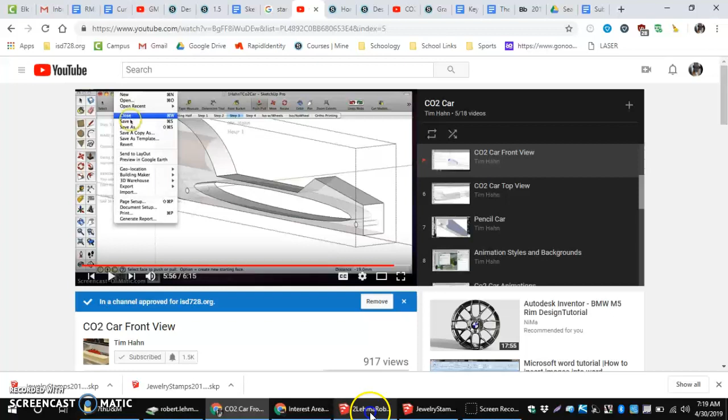In this video, I'm going to show you how to do our front view cuts. So we're going to be modeling and taking apart our front view cuts.

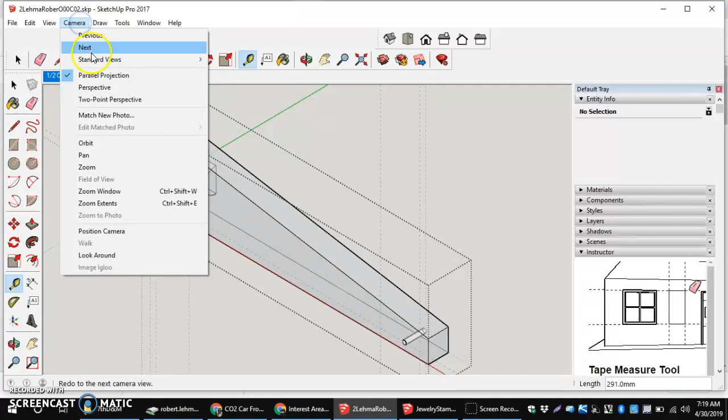Before we start, a few things to think about: first, the area around our CO2 cartridge. To help see this better, I'm going to go camera, standard views, front. The area around our CO2 cartridge, we should stay about 3 millimeters off of that.

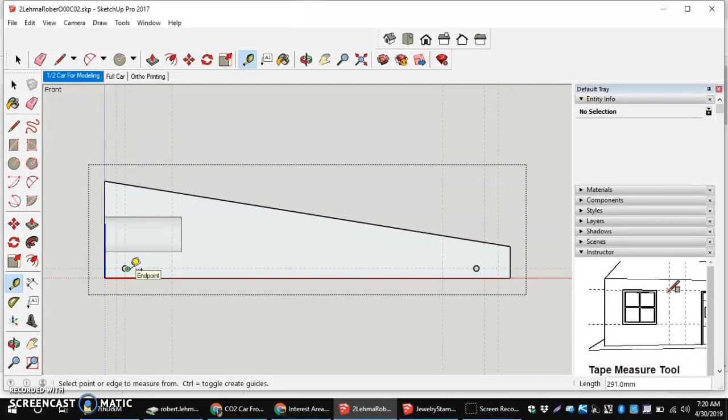We also cannot remove the material underneath our axle holes. So as wide as the axle hole is, the 4 millimeter diameter or 2 millimeter radius, we want to make sure we're not removing material underneath the front and back axle holes.

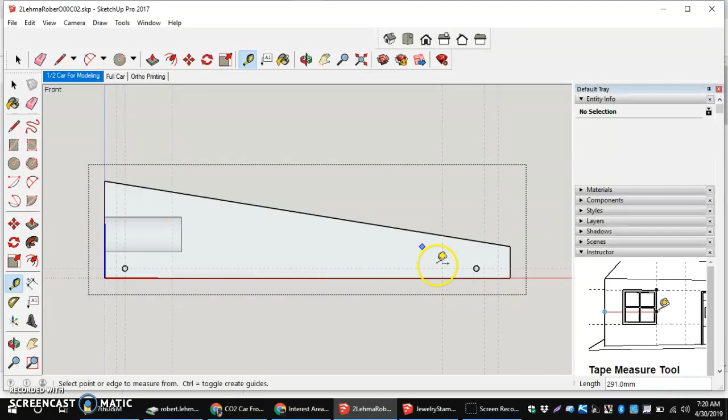Lastly, if you're planning on doing an arc from the top view instead of a straight line cut, leave the bottom unaffected for now. Let me go to the top view to show you what I mean. If you plan on doing something like an arc from here to here, instead of just a straight square cut going back, hold off on taking any of the bottom off underneath too.

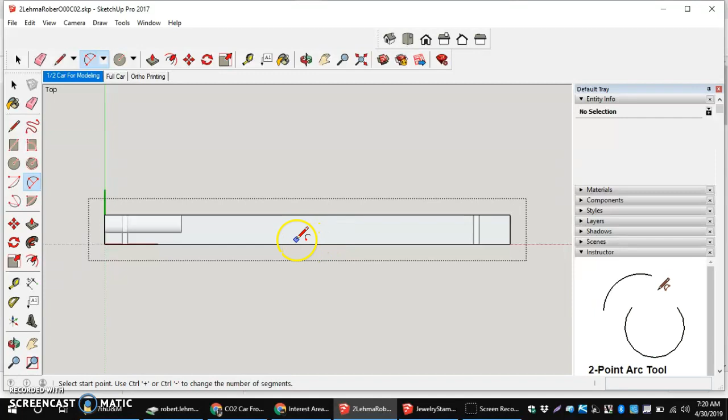Going back to standard views front, I have the camera views turned on. That's right-click views on the toolbar if you want to turn that on, so it's easier than going camera standard views every time. I'm going to go to my front view there.

One of the important parts about doing this is making sure we start and end on the model. I'm going to do the top portion first, starting with just an arc using the arc tool right here.

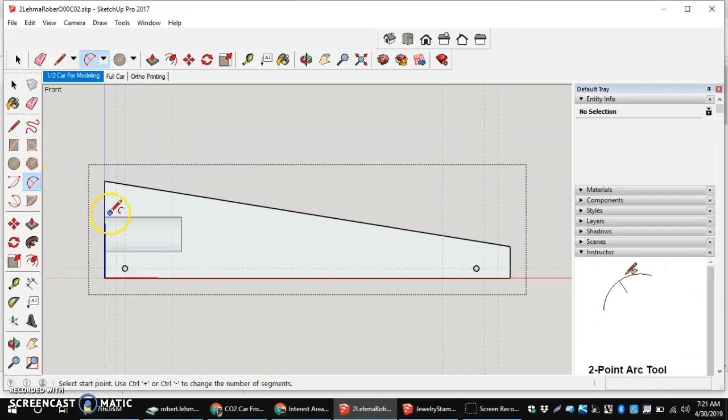If I click, and then click again, it allows me to do a little bend that way, just like so. If I want to carry this out a little further, I can come down, click, and click again, and bend that the opposite way.

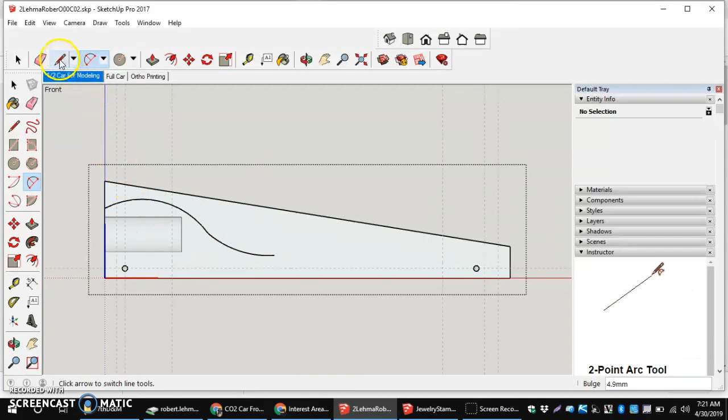From there, I'm going to use some straight lines, taking my cut all the way to the front, close to my axle hole. Then I'm going back to my radius tool, because I want the cut to go up and around, hopefully skip up and around.

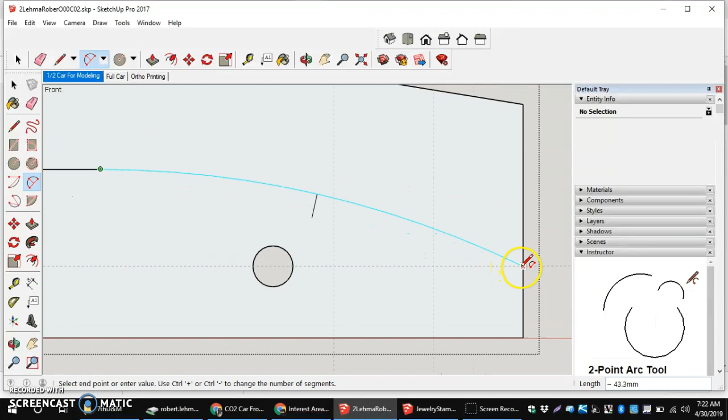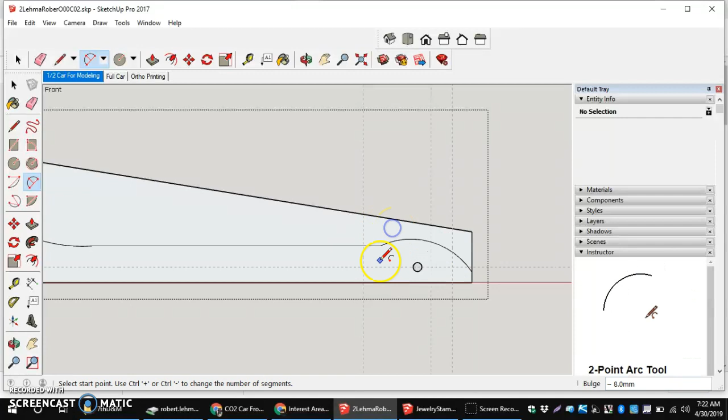Clicking here, clicking to the front of my car, maybe even a little bit lower. I'd give some space from your axle holes too, because otherwise you don't want to come out the other side and end up cutting through a surface of your car. I'm going to go up a little bit, so hopefully this bend causes the cut to go up and over to the backside.

Now the next thing I can do is take my push-pull tool. If I orbit just a little bit around, I can come in and cut this portion off, just like so. Now I have the front view of my car.

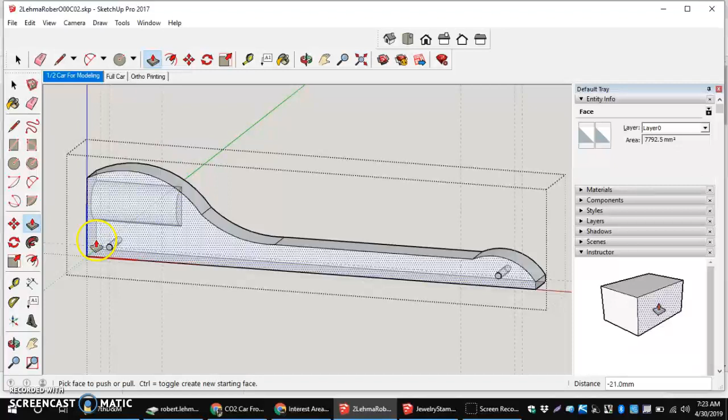Now the next thing I can do is cut any little portions I want off my bottom. I'm going to leave my middle unaffected right now because I'm going to do more of an arc than straight line cuts. Coming in from there, back to my camera view front, I'm going to take out some material underneath my axle holes.

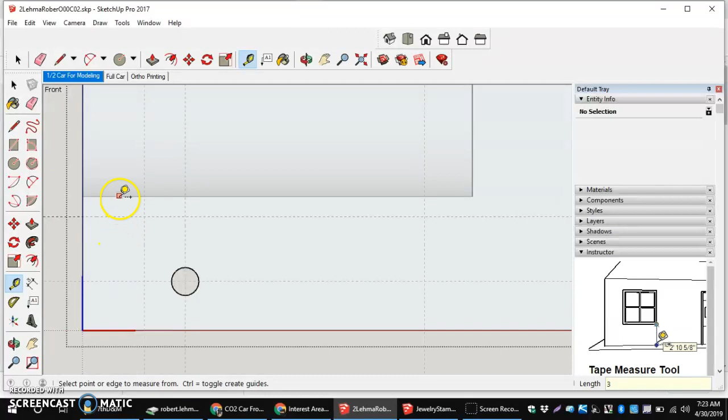Once again I'm going to use the arc tool; it's kind of up to you how you want to shape this. I want to be about 3 millimeters away, so I'm going to move down just a little bit. If you want a gauge, you can use your guideline: come onto this piece and come down 3, enter.

That way you have an idea where you can start away from your CO2 cartridge hole. It's just good to do. And if you want to be really close over here too, you can do the same for the top, 3, enter, so you can see where those actually are. I could actually go down a little bit closer, which I might.

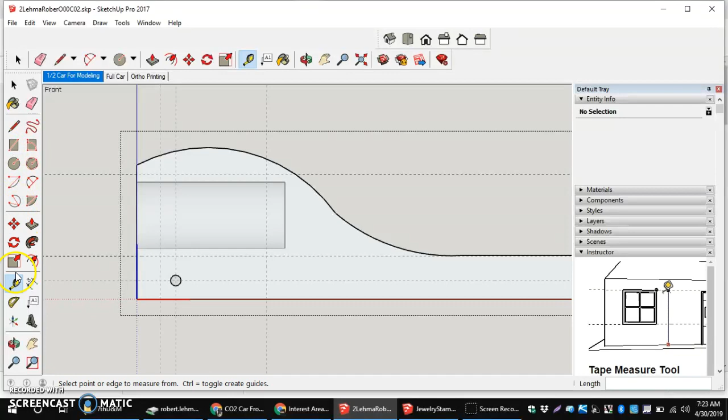Now, going back to my arc, I'm going to take a little bit away right here. Remember, I can't take away underneath my axle hole, but I can get really close, right to the edge, and bend that. I can bend it either way, this is underneath that portion.

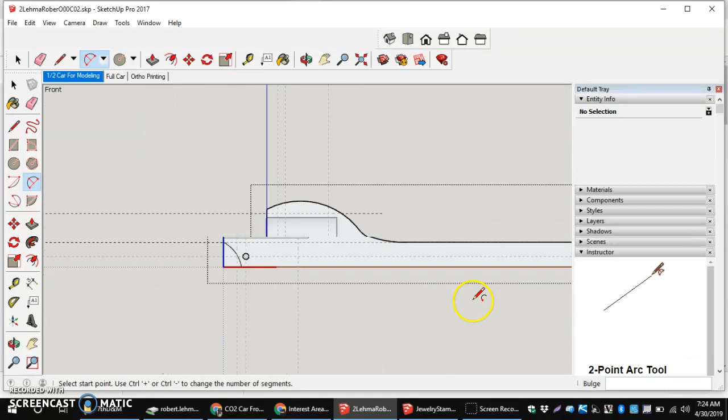Then, once again using our push-pull tool, along with a little bit of orbit so we can see the backside, click on that surface and move back. One thing I forgot to mention is making sure you're in the model. I've been doing this the whole time without realizing I double-clicked in, but it's important to be in the model, otherwise it won't work correctly.

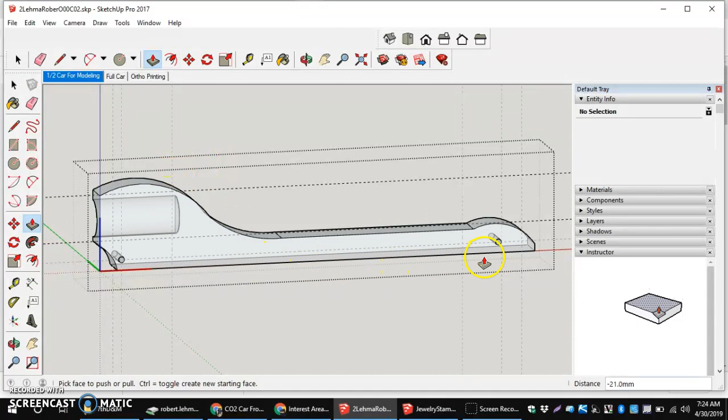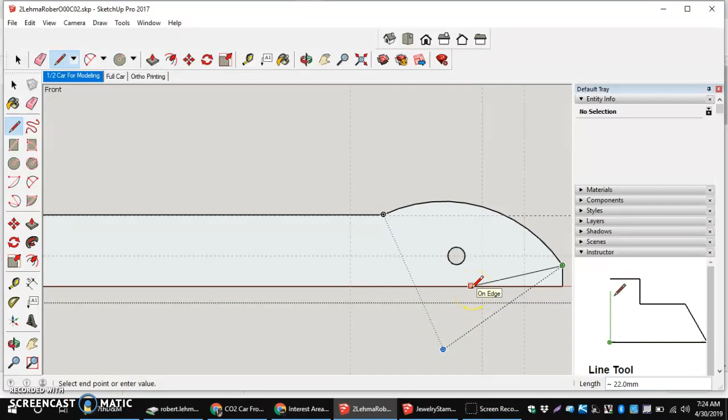Then I'm going to go to the front of the car and remove a little bit of material there too. Back to my front view, and going here, I'm just going to do a straight line cut underneath from the point I used my arc, close to what I have right here. That's kind of ugly, so I'm going to press escape, which stops that action from happening.

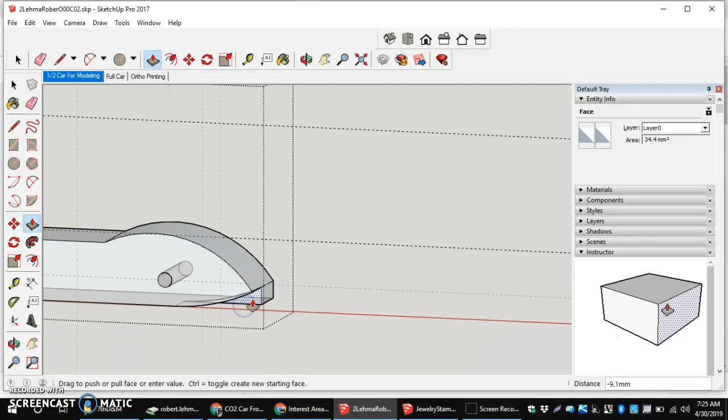Escape works in any tool. I'm going to do more of an arc instead—changed my mind, indecisive. Remember, we can't add material, so tangent to edge is as far as we can go. Then, lastly, one more time, coming in and cutting this portion away by clicking on the front and push-pulling it back.

Orbit, zoom in. You can do Camera, View, Iso to see your full car, to check out what's going on as far as the back side that's mirrored.

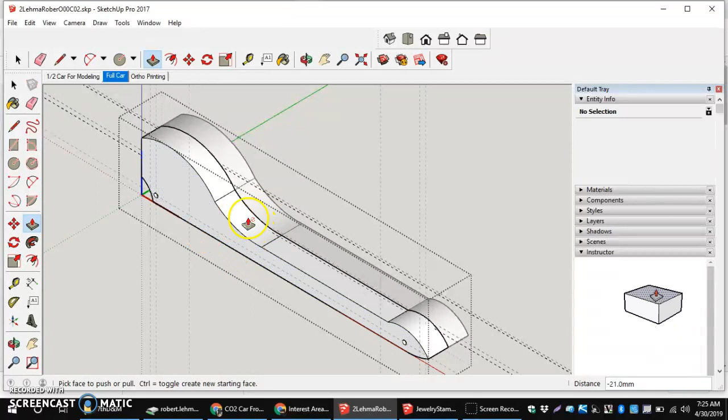Once again, I am going to end up cutting this portion out on the bottom and make it skinnier as I go down here. But before I do that, I'm going to make some adjustments on my top view. If you aren't worried about your top view and you're just doing straight line cuts, you can do that right now in this step.

If you are going to do an arc on this top view, you want to wait until later.